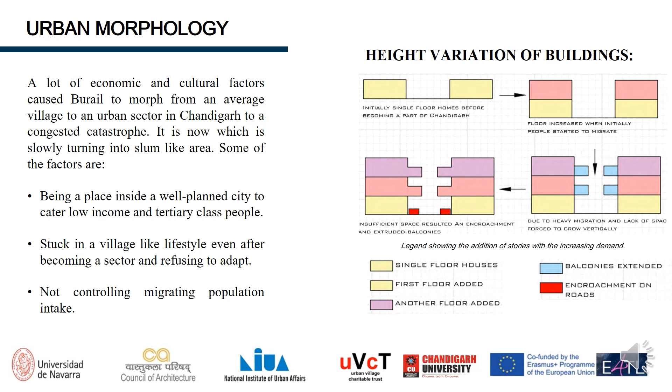With VR and D5 render software, we created visualizations of proposed public spaces like pocket parks and community centers, integrating them seamlessly into the existing fabric, enhancing both usability and aesthetics.

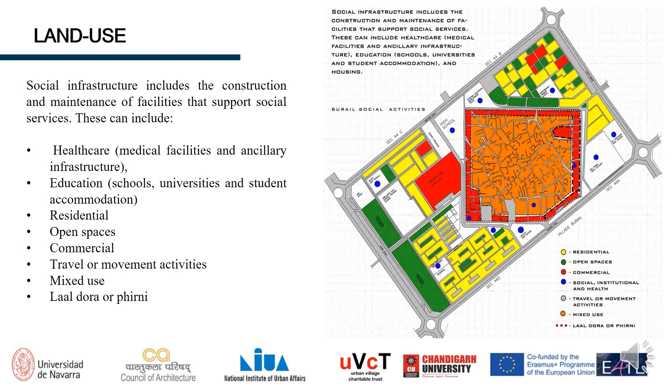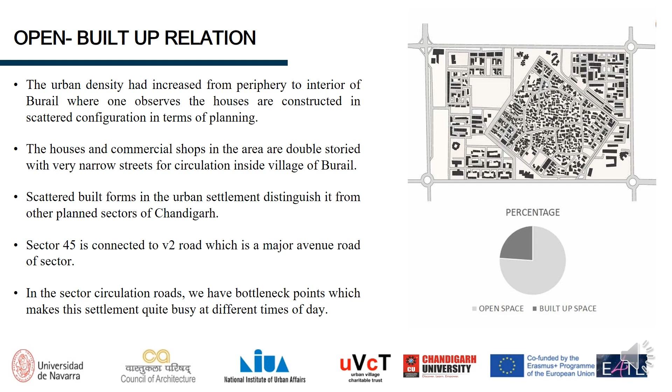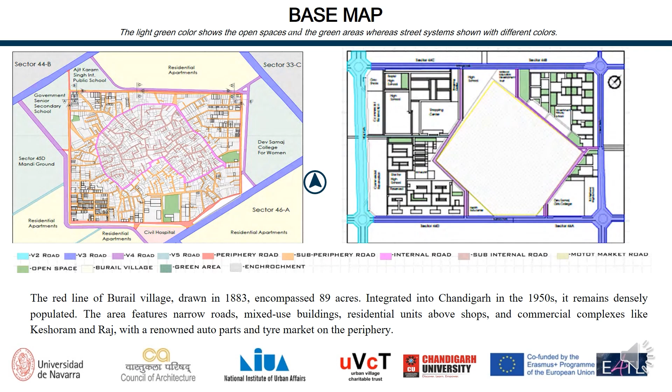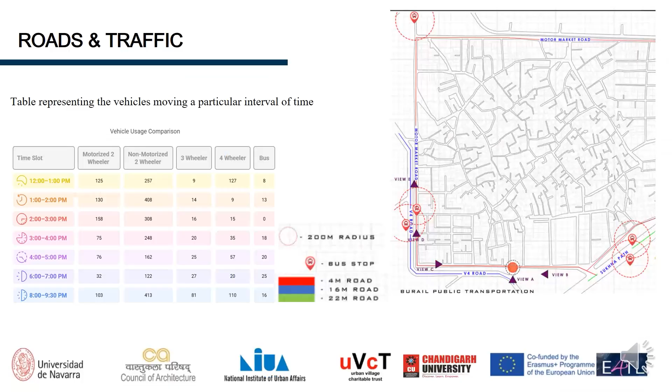Streetscaping here shows the potential for green corridors and better pedestrian spaces. Burail's cultural landmarks are the heart of its identity. VR heritage tours can boost tourism and local pride, embedding Burail's rich history within modern policy frameworks.

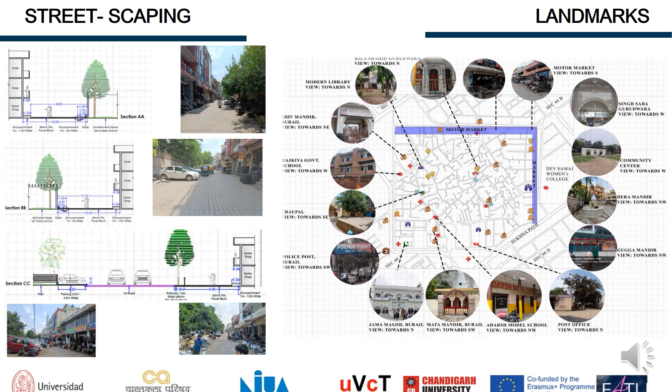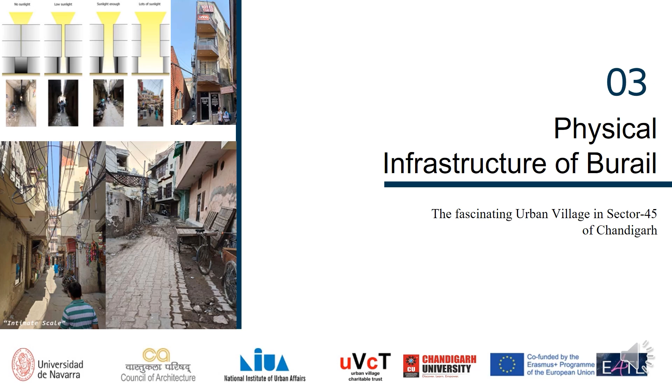This introduces Burail's physical infrastructure, highlighting both the potential and the gaps. Today's physical infrastructure is struggling to meet the growing demands.

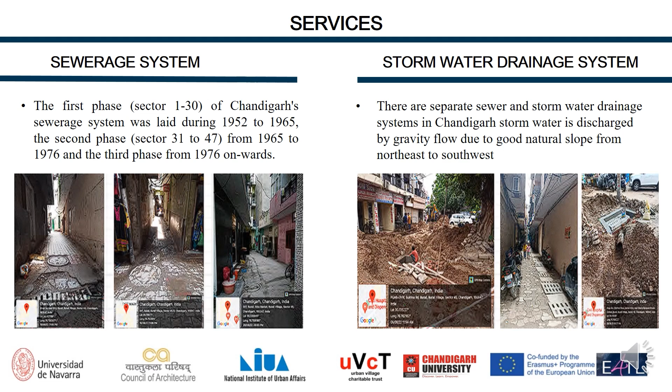The sewerage system in Burail, though integrated into Chandigarh's network, suffers from aging infrastructure, while Burail's natural slope aids stormwater management, but unplanned growth creates local flooding risks.

Solid waste is collected daily, but encroachment and illegal dumping persist. VR experiences can visualize new waste management facilities, making these tangible for residents and stakeholders.

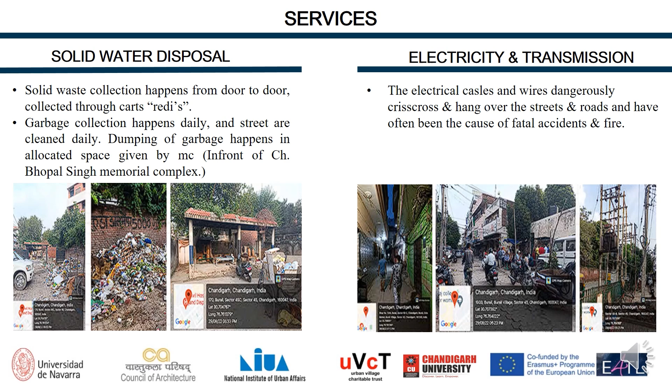Crisscrossing electrical cables create safety and reliability concerns. AI asset management tools can map and monitor these networks.

Burail enjoys good network service, a vital asset for digital policy implementation. Water supply in Burail comes from Sector 32's works, but quality issues arise during the rainy season.

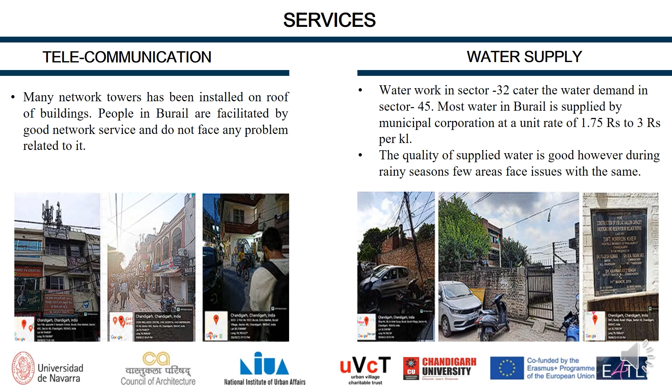Burail faces the lack of parking and street encroachment, which hinder both pedestrian and vehicular movement. Also, there are only four public toilets existing on the village periphery.

Burail lacks fire hydrant systems, posing a grave risk. AI emergency response modeling can identify the best location for hydrants and optimize vehicle movement paths.

Street lighting in Burail is robust on the periphery but limited within the village core. The stormwater system in Burail has an efficient drainage network but lacks in the capacity variability.

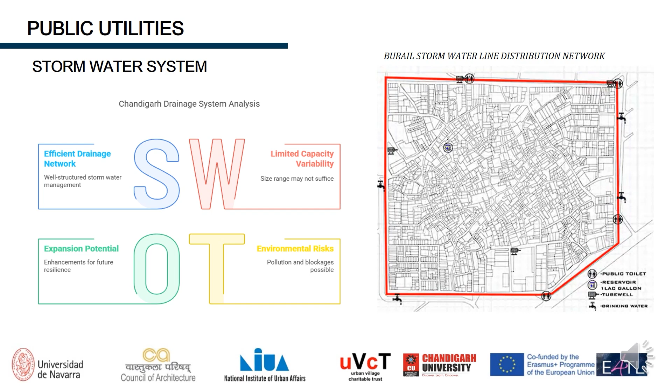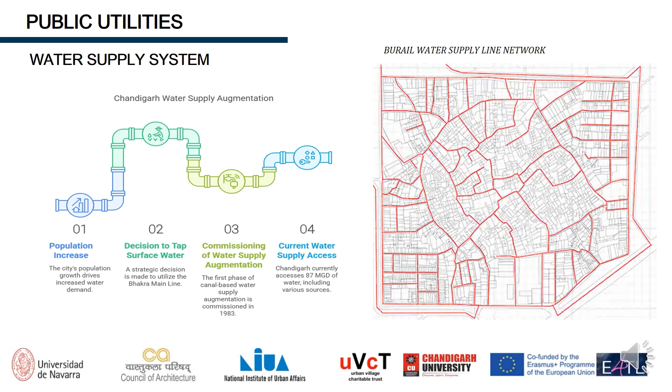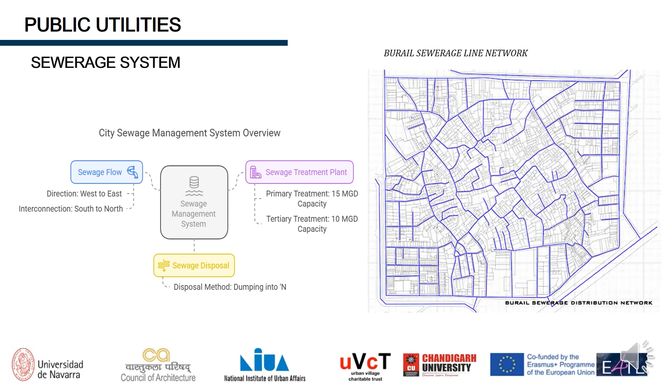Burail's electricity and telecommunication network lines are directed from Chandigarh administration and Punjab State Electricity Board transmission.

Burail's built form reflects a transition from rural vernacular to unregulated urban sprawl. To preserve architectural character while modernizing the space, AI can be used to classify building types, elevations, and facade elements.

This transition from a traditional agrarian settlement to a dense urban cluster highlights the tension between history and modernity.

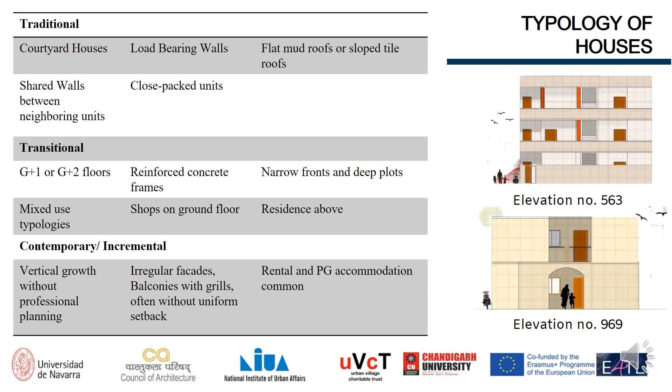This slide defines the typology of houses based on the traditional, transitional, and contemporary factors.

Edge analysis reveals critical vulnerabilities in Burail's built environment, as the edge conditions are weak with undefined transition between public and private spaces.

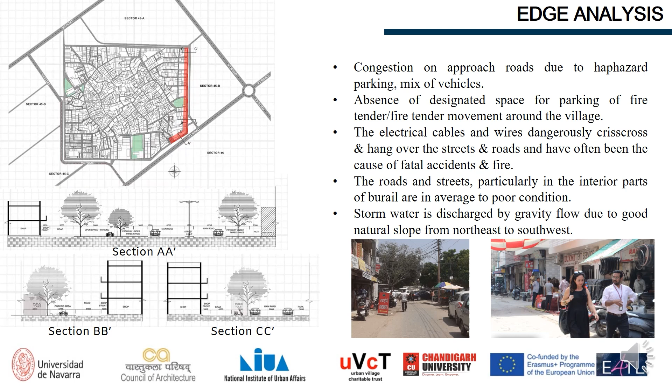This slide anchors our transformation strategy, a data informed, technology driven policy proposal that respects Burail's heritage while ushering it into a smarter, greener future.

Here, AI and VR are not just tools, they are co-creators in this journey.

Along with site visits, we had brainstorming sessions with the team based on data analysis and design explorations, which helped us provide interventions ranging from street hierarchy reforms to microgreen spaces.

These are the identified problems within the Burail village. Narrow, congested roads block emergency vehicles, posing serious policy challenges.

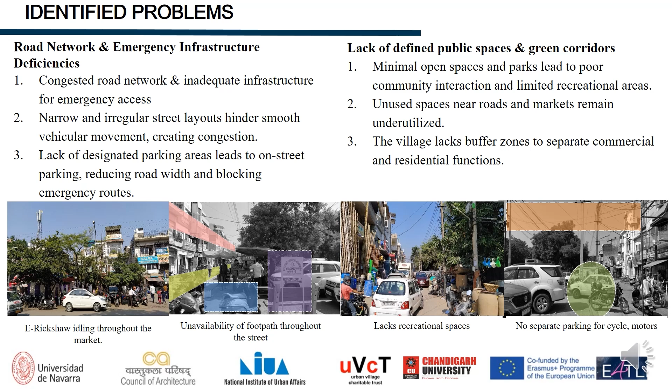Along with Burail's core problems, congestion, inadequate green spaces, and conflicting land uses call for targeted, adaptive policies. AI problem mapping can continuously update these challenges, while VR visual storytelling ensures policies resonate with those most affected.

Based on our findings, we proposed solutions such as establishing clear street hierarchies, multi-level parking nodes, and dedicated emergency lanes. These solutions blend AI's precision with VR's immersive testing, ensuring they aren't just theoretical but practical and designed for long term sustainability.

Our vision for Burail is one where tradition meets technology, where AI supports data driven decisions and VR enables participatory planning.

We applied AI to scan underutilized land pockets that could be converted into microparks or buffer zones. With VR, we created 360-degree immersive proposals for these green corridors, showing how even small interventions could enhance livability, improve air quality, and create social hubs without major land acquisition.

The impact of these tools was transformative. AI brings clarity to complex urban dynamics, while VR ensures people can see, feel, and respond to proposed changes.

Our first proposal redesigns streetscapes for safety and vibrancy. AI traffic flow models fine tune these designs for real world effectiveness.

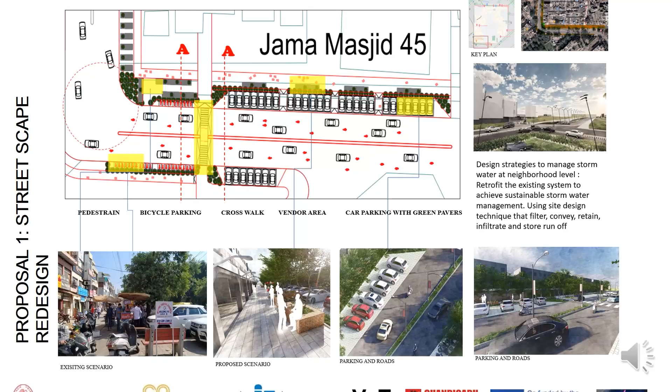VR and D5 render-based pedestrian experiences showcase how these redesigned streets would feel in daily life, making policy adoption smoother.

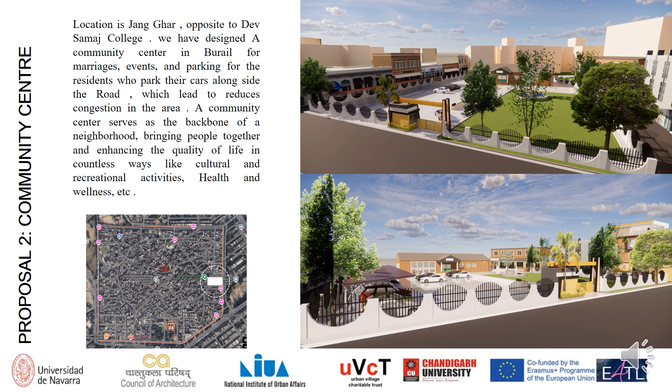Second proposal: Community Center. This community center in Burail is envisioned as a vibrant hub for the people of Burail, designed to cater to a wide range of needs, hosting cultural festivals, wedding events, and wellness programs that strengthen community ties and promote social well-being. VR technology takes this vision even further by creating immersive previews of the center's daily life.

Third proposal: Skill Development Center. This skill development center, strategically located near Gurdwara Shahidi Killa Sahib, is designed to be a catalyst for Burail's social and economic revitalization. It's more than just a place to learn new skills, it's a place where aspirations can be nurtured and community pride can grow. VR walkthroughs bring these possibilities to life, letting residents step into these future-ready spaces virtually, imagining themselves learning, collaborating, and even starting small businesses.